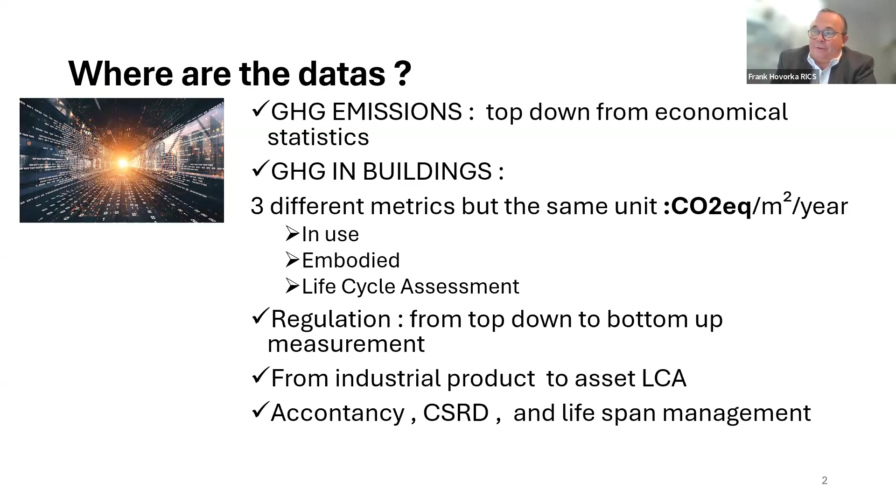And it's quite important to have that in mind, because the CO2 emissions will depend, of course, on the service you expect, but also on the material or equipment you are using, how this material is made in the factory, and what is the fuel source at the factory, because it will have an impact on the embedded CO2.

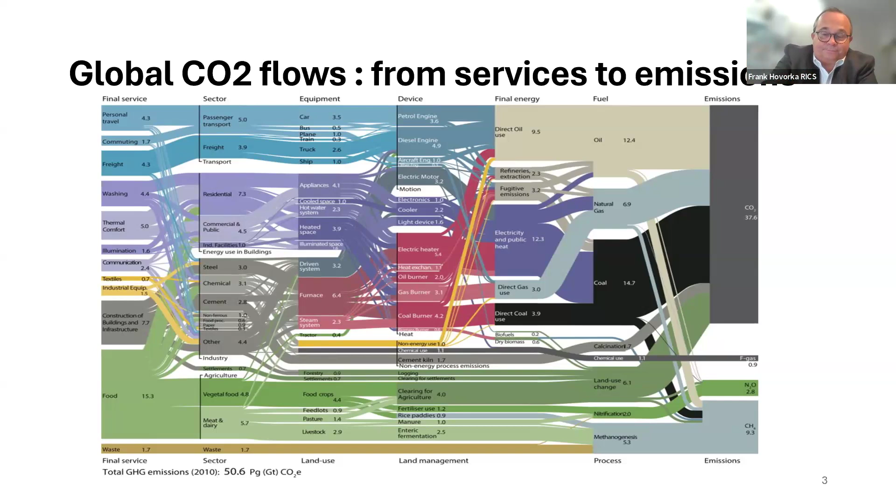What I also want to insist on is that we use the same unit, CO2, but we have to keep in mind that when you look at the declarations, there is also the need to look at whether we are talking only about CO2 emissions, or whether we are also looking at the other gases which have a warming power.

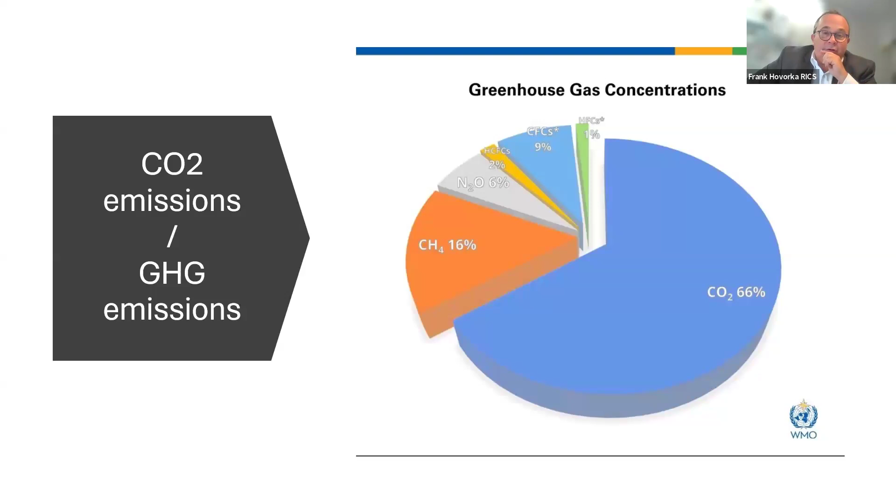And then we see that the most important one is, of course, CO2, but we are also impacted in our business by CFCs and HFCs, which are the gases that we use mainly in heat pumps or air conditioning systems. So it clearly has an impact. But having said that, we also have a third metric.

So you see, we have CO2, CO2 equivalent, but we also have a third metric, which is the life cycle assessment, also expressed in CO2 equivalent per year, but it's a totally different calculation, because we look at the embedded carbon in building materials, then at the use stage of a building, where we look at the emissions linked to the energy consumption of the building itself, but we also include the impact of replacement, repair, and refurbishment according to the lifespan indicated in the product declaration. And we can also look at the post-use of a building and the end-of-life stage.

I will not go deeper on that, because I'm sure my colleagues later on will go into much more detail. But it's important to keep in mind that when we speak about CO2 and about how to deliver information back to the market, we are using CO2 equivalent per square meter per year, the same unit, but we are not saying the same thing when we speak about impact in life cycle assessment, yearly CO2 emissions from the energy consumption of a building, or CO2 emissions that happen once when you build the building during the construction phase.

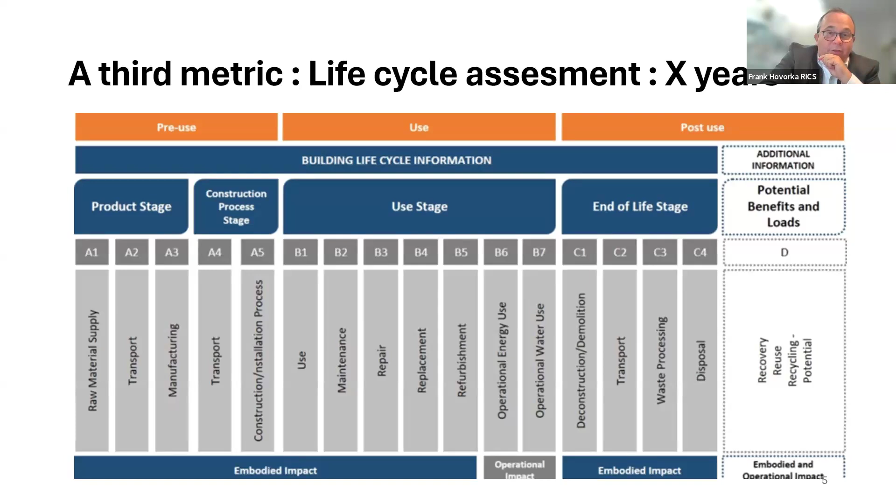We also have another problem with energy performance and carbon emissions, because when we look at the building itself, under different regulations in Europe or around the world, you look at building-related emissions and energy use that can be regulated or unregulated. In every system, we don't take into account non-building-related energy use, which is plugged into the building. But when you look at yearly CO2 emissions in the national definition, we have to take it into account. So it's not in the regulation, but you have to take it into account in the yearly national declaration. And of course, we then have all the definition problems with on-site production, imported energy, exported energy, and on-site renewable energy production.

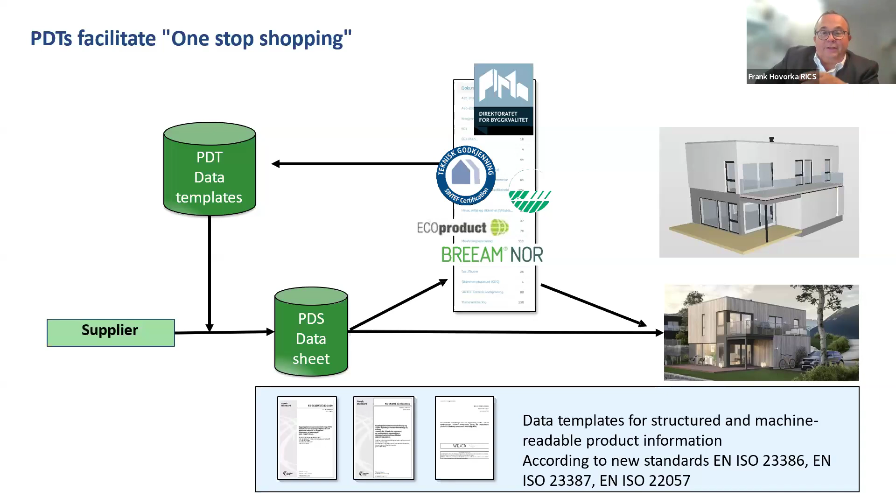So it could be any certification process that we have here, or like in France, in the regulation that we have, which is mandatory to do a life cycle assessment for each building. And then it can be used in the handover documentation of the building.

The challenge we have to face now in this digital product passport and environmental product declaration is a harmonized approach with the same definition, the value, the way it was measured or calculated, the way it was certified, and we need to have for each product a unique identification tag in order to identify a product into a building or into a

digital twin. So this is really the challenge for the European Union in this new regulation to be tackled, and it will take, as I said, at least 5 to 6 years to finalize this work to achieve such standards on data templates and data sharing.

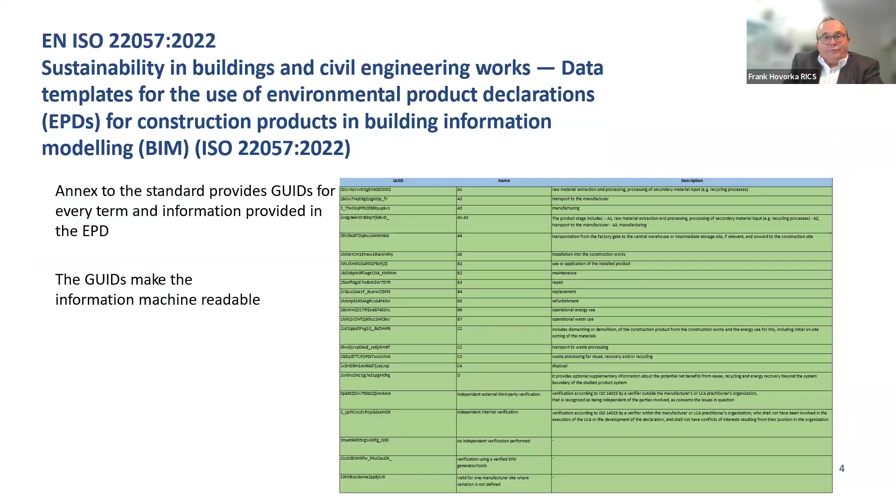You can have here an example of how this ISO standard is used for data templates of your environmental product declaration. But what is interesting is something we have worked on, for example, with our colleagues in the northern countries, Norway, Finland, Sweden. The idea is to have an environmental product declaration which is produced by the industry and the supplier. This information is then sent to a database depository, which are now these companies that you have under the name

of company PIMS. It could be used by a machine-to-machine readable system, because you can't do a life cycle assessment without that, because you can't do it on an Excel sheet. If you have to face up to 400, 500, 600 types of components in a building, it's impossible to manage all the data in another way than to have a machine-to-machine readable system. And then you can have this design, and you have also the impact on the construction.

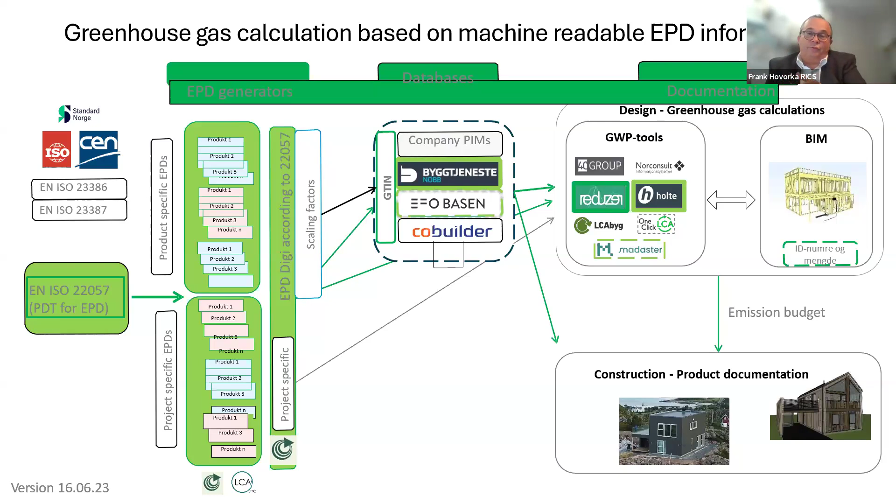So the standards are existing. It's ISO standards. It works. What we don't have now is the interoperability and the machine-to-machine readable data system in order to move easily from the EPDs to the database, to the lifecycle assessment tools, into the certification process in order to achieve that.

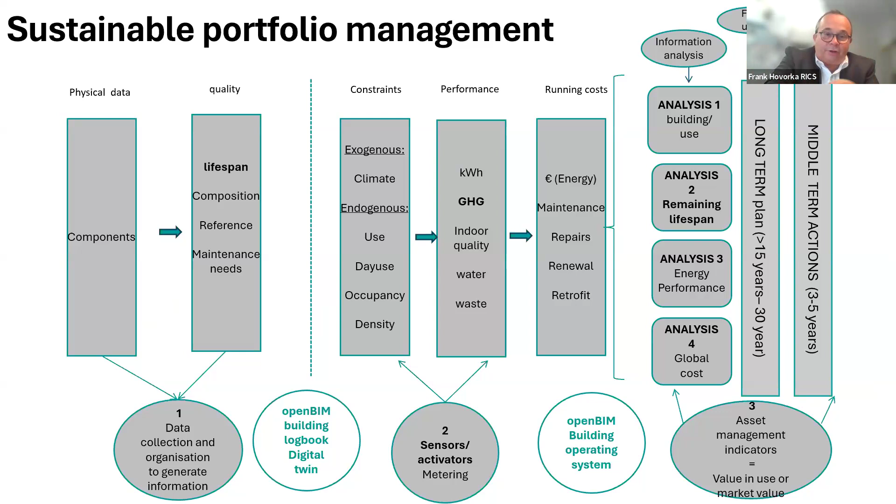But the idea behind is not only to have information about environmental product declarations embedded in the building and how it works. It's also to work on the impact that it could have on finance. And I will show you that because it's something we have developed for Europe and how to achieve a sustainable portfolio or sustainable building. We are also pushed by the regulation, carbon regulation in Europe, market requirements, and of course,

financial regulation. I know that it's not obvious, but we are really pushed by the financial regulation, by all these corporate sustainability reporting directives that we have to face up to, because every company has to report its CO2 emissions and greenhouse gas emissions into a standardized reporting system.

It will have an impact on your extra-financial reporting as a company, and it has to be audited, and it has to be standardized in order to be audited and to verify your level of greenhouse gas emissions. And part of that is the embedded carbon in the materials and the construction materials.

So everything is linked, from the information given by industry about the embedded carbon of a product to the whole life cycle assessment of a building, which has an impact on the extra-financial report of a company and its economic value in the coming years because of these regulations that are going to be in place in the coming years. Thank you very much.

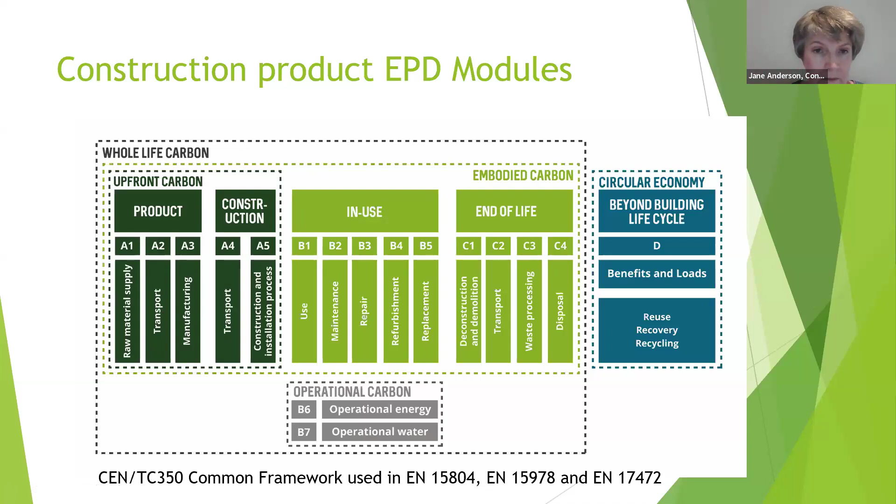Based on the scenarios, and they do now give you information on biogenic carbon content, and again that information is what's used in France when they look at the long-term benefits of carbon storage. It doesn't mean you have to do a different EPD, it's just the way they actually do it at the building level that's different.

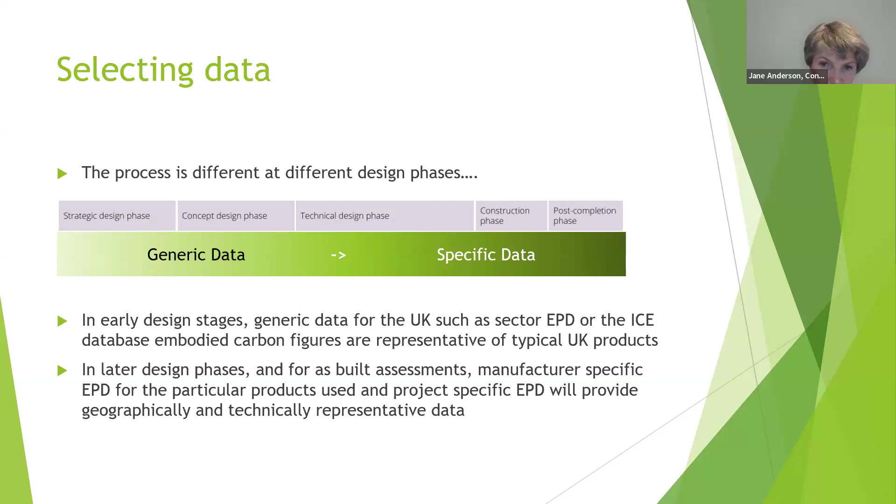And in terms of selecting data, basically in these early stages, when you're doing initial designs at the very beginning of technical design, it's generally best to be using generic data because you're not actually sure which manufacturer's product you're going to be using, and it will give you a good average, if you like. As you move through, ideally, you should be looking for specific data for the products that you're using. So if they've got EPDs, you should be linking to those, particularly for post as-built and construction assessments. So if there is an EPD, that's where you would be using it.

And it follows the RICS professional standard on whole life carbon, which looks at uncertainty of data, and I'll show you this then. So in theory, this goes through and tries to identify the data that would be the most relevant and have the lowest uncertainty available. So have a look at that. It's only suitable, as I say, though, for post-construction or when you actually know exactly what product you want to use. If you're at an early stage, then generic data would be the better data to use.

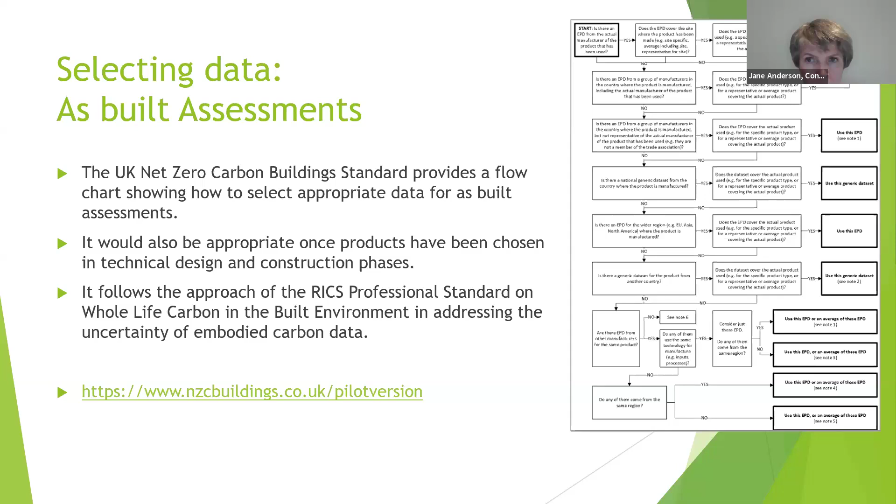And as I mentioned, the RICS professional standard has what we call a carbon uncertainty factor, which is one of the three things that join together to give you the uncertainty that you need to add to your assessments from technical design phase onwards to account for uncertainty. The carbon uncertainty factor just looks at the carbon data. There's another one for the design stage that you're at and another for the quantities data.

The carbon data only applies to the 10 carbon data sets that have the biggest impact in terms of embodied carbon over the life of the building. So you only need to look in detail at the 10 data sets that contribute the most in terms of embodied carbon. And for each of these data sets, you're comparing the actual products that you've installed in the building to the data set that you've used to represent them. You're looking at geography, technology, and time, essentially, and some other aspects which I'll show you.

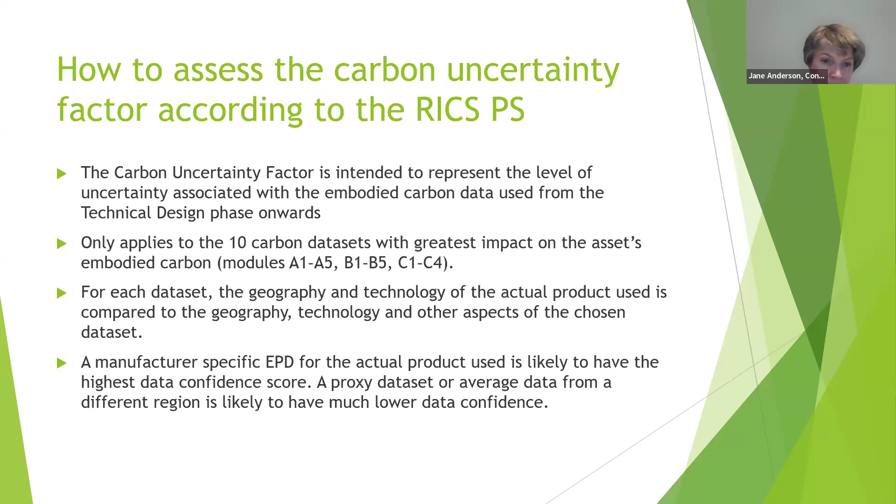The same for technology, in terms of the technology used to make the actual product and your data set, how specific the data is, and then how old the data is, and then how specific it is in terms of granularity, how many manufacturers it's covering, and then whether it's been verified or not. And I'll give you some examples.

So this one, if you've installed a lightweight block made by a particular company that doesn't have an EPD, and you've used the ICE database data, for example, then in terms of geography, that would actually be very good, because the ICE database is intended for use in the UK. It uses data sets that are relevant to the UK, so the geography would be good. But the actual data set in ICE is for medium dense concrete, not lightweight aggregate concrete, so it only partially reflects the technology. And in terms of specificity, the ICE database is very much an average data set, therefore only fair in terms of its quality here.

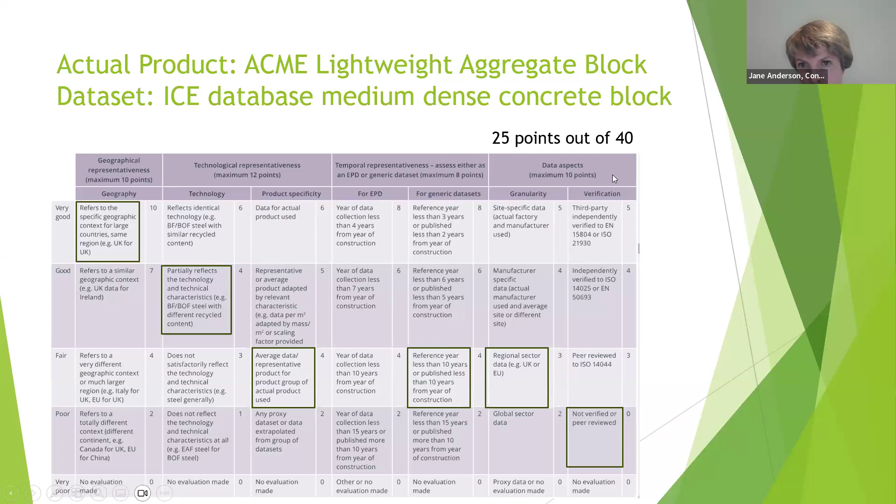And then as it's a generic data set, we use this column here for its temporal representativeness. The ICE database was last published in 2019. They are about to launch a new version. So it would come in here because the reference year or publication is more than 5 years. And then in terms of the granularity, it's regional sector EPD data, and it hasn't been verified or peer reviewed. So when you add up these scores, you get 25 points out of 40.

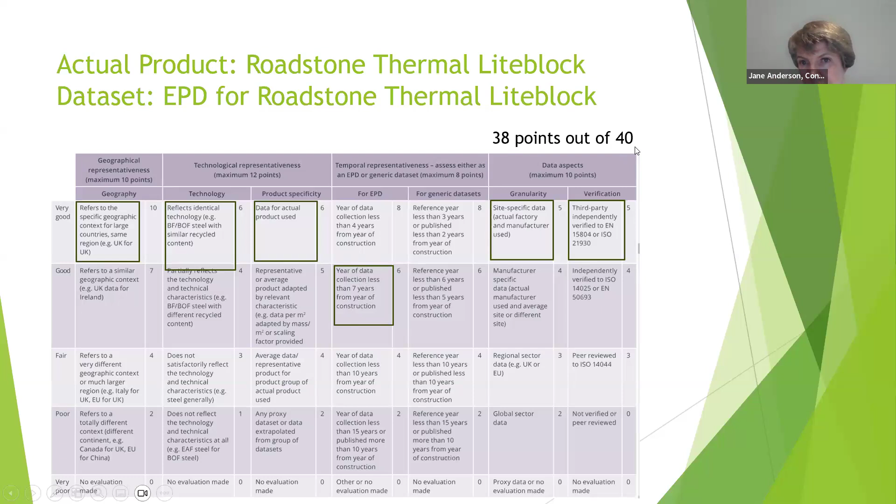Whereas if, for example, you used a product that does have an EPD, a thermal lightweight aggregate block, then you could use their own EPD, and here it gets top marks except for the year of data collection, because that was more than 4 years before the year that you'd be installing it in the building. So that would get 38 points out of 40. So hopefully that helps you to understand how that works.

2 minutes, Dave, sorry? 2 minutes. Okay, yeah, I think we're fine.

Making comparisons with other products, it's really important. You can compare different types of products. So you can compare apples and oranges. If you were looking at calorific value, let's say, you wouldn't be able to compare them in other ways.

So 15804 provides rules for comparison. So long as the products provide the same functional requirements as defined by legislation or the client's brief, then you can make a comparison. So you can compare, for example, a blockwork wall and a timber frame wall, so long as they do all the things that building regs and your client wants that wall to do. They can be made out of different types of material.

But you need to make sure that you've basically included everything. So you would need not just the blocks, but the mortar, for example. So you're taking account of ancillary materials and other parts of the system. So you need to do that. If you exclude something, you could, for example, exclude the paint because it might be the same for the two systems. And if you were comparing different types of brick, you could exclude the end of life if that was basically going to be the same.

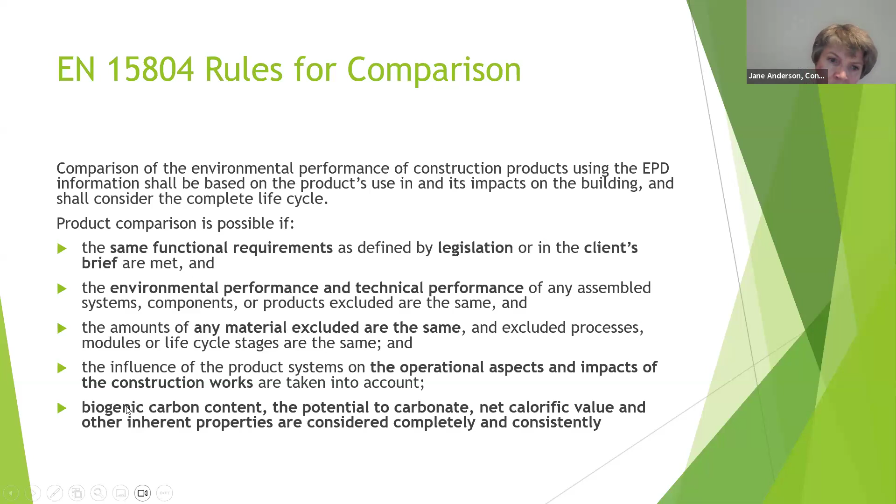And anything that has any impact on the operation of the building, for example its thermal performance, you need to take that into account. And you need to check that your EPDs have been calculated consistently. Those are the kind of rules. Things to watch out for: you need to check the scope of the EPD, what's included. So has it included water or does it exclude it, for example?

Can you convert the EPD to the same declared unit? So for example, if you've got your blocks and some are in meters cubed, some are in tons, some are in kilograms, you'd need to convert them to a meter squared so that you could actually compare 1 meter squared of walls made with the different blocks. As I say, the ancillary items like mortar. Do they have different service lives? You might be looking at roof tiles, for example. Would you expect one to last longer, in which case you need to take that into account? And again, the end of life, particularly if the EPDs say different things about what happens to them, would it actually be the same, and is it relevant?

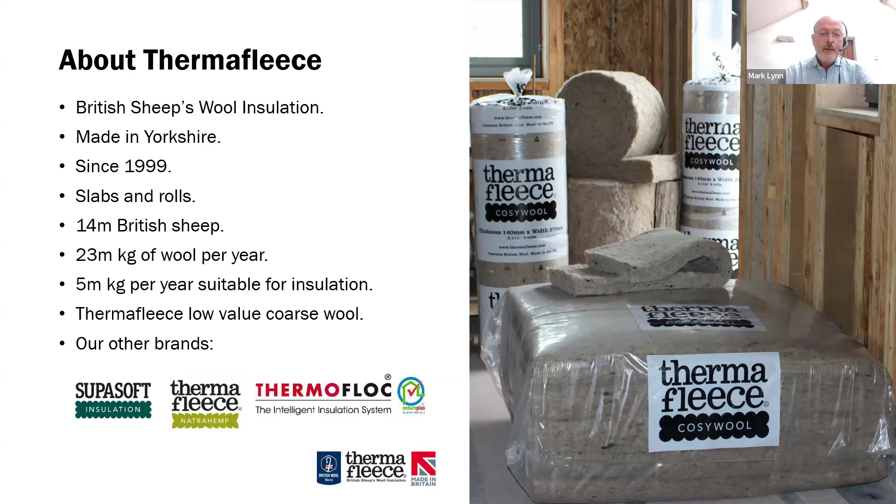And we've been featured on various media. We've even been featured on Coronation Street. Don't ask me about that.

So why an EPD? Well, I think the first thing is it supports green claims, because I'm committed to this sustainable built environment, but you can't just take my word for it. So you need evidence to back up what you say, and we've heard that from the two previous speakers, and it shows a commitment to transparency and objectivity as well. And I think transparency is key to the future of the built environment.

And it's interesting because an EPD isn't a statement that something is sustainable or not. I've certainly heard Jane say that. I don't know if she mentioned it in the presentation, but she's certainly made a point of it in the past, and it's true that having an EPD is not a statement that a product is sustainable. An EPD is a report that shows in a verifiable, objective way that a product has various impacts across a series of categories.

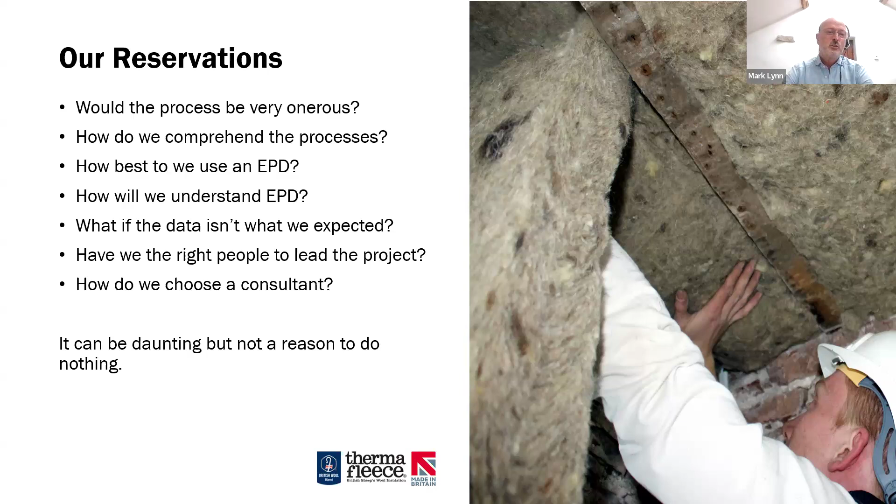And then how do you choose an expert? I think it's probably a useful thing for maybe Jane to feed into, because we went through this process about 5-6 years ago now, and it was difficult finding appropriate consultants, although we were fortunate in that we knew one that had worked with us before. But choosing an expert or a consultant is quite a challenge. And just because it's daunting isn't a reason not to do it. It does look daunting, but it's not as tricky as it looks.

Understand the process. As I said, it's an exercise in mapping and data collection first and foremost, and then understanding the boundaries and allocations. Just on the allocation, in our case, our impacts are allocated on an economic basis. There is criticism of sheep farming, for instance, in that it produces a lot of methane, and those in turn have impacts, which is true. But what we've got to do is work out the economic value of all those outputs, and then work out on an economic basis what the allocation of those impacts are for our products, and relative to the other farming outputs, the wool that we use is very low impact.

We chose to set the boundary at a point we thought was fair, and there's a temptation to try and fudge the boundaries to make your product look better, and we didn't do that. We could have put the wool cleaning process outside the boundary, because strictly speaking it's a rendering process, but we thought it was disingenuous to do that, so we included those impacts in our LCA and our EPD, because we wanted it to be the most honest assessment of our product, and not to try and pull the wool over people's eyes, excuse the pun.

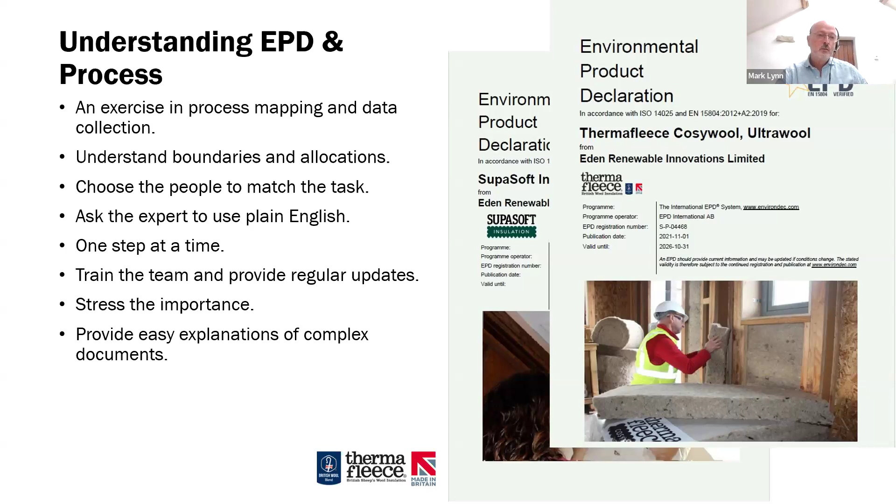We had a kick-off meeting in July, and then the LCA, the life cycle assessment, was complete in October, which is about 3 months. Then COVID hit. But typically drafting the EPD would probably take another 3 months and then a month to get it verified. So we're probably looking about 6 to 9 months from start to finish. I don't know if that's along the lines of what Jane would expect or not, but

obviously there's a lot of data collection required. It's not a bewildering amount of data, by the way, but there's data that needs to be collected. So 6 to 9 months, as long as you don't sort of sit on your hands waiting for other people to do things, then it's not too difficult, really.

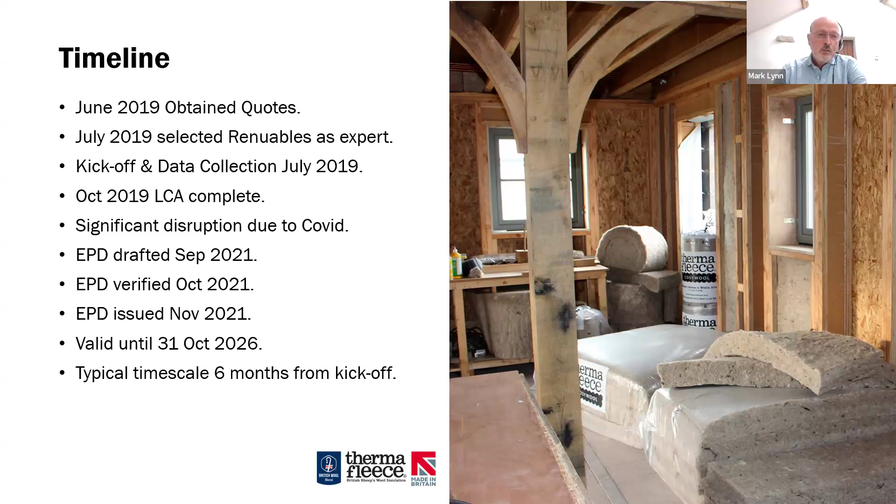Costs. We got 2 EPDs covering 4 products. So we've got 1 EPD for our CosyWool roll, slab and UltraWool, which are sort of variations of the same format, and 1 EPD for our SupaSoft recycled polyester insulation. And the total cost at 2021 prices, so don't shoot me if these are a lot higher now, because we obviously had a big bump in inflation since then, was about 15,000.

And that covers a 5-year period because the EPDs are valid for 5 years. You've got an annual fee. So if you annualize that cost, it was less than 4 grand a year, or less than £1,000 a year per product. So if you're an SME and you're saying you can't afford 15 grand, then you've got to have a look at your budgets and work out where your priorities are, because 15,000, you're probably not going to get a lot of change out of that doing two exhibitions or 2 shows. And so you just got to work out where you're going to put your budget.

If you haven't got a 15 grand marketing budget as an SME, you've got to question whether you've got the right business model and funding model for your business. So I don't believe, and I can say this because I'm living it, that EPDs are too expensive for small businesses. It's just a question of prioritizing where you spend your money. And there are lower cost ways of doing these things, but you've just got to be mindful that sometimes you get what you pay for.

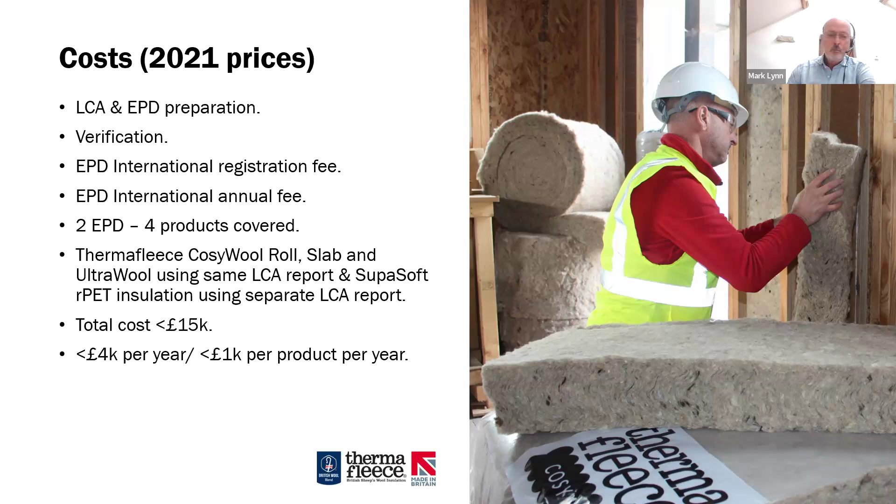Learnings: well, it's manageable and affordable. I believe it's a high priority. It should be a high priority, particularly if you're, like us, running a business along sustainable lines. It creates a greater understanding of your proposition and gives you the confidence. And it provides an opportunity for the rest of the team to learn that as well.

And if you're going to do it, just pick the right people for the task. It's sort of seen as a very sciencey thing, but actually a lot of it is data collection in the first instance and process mapping. And a good expert will be able to talk you through that. So you don't necessarily need to pick the most sciencey person to do it. I'm the most sciencey person in our business, but I'm probably the least organized. So someone that's got maybe some good, strong organizational skills might be a better one.

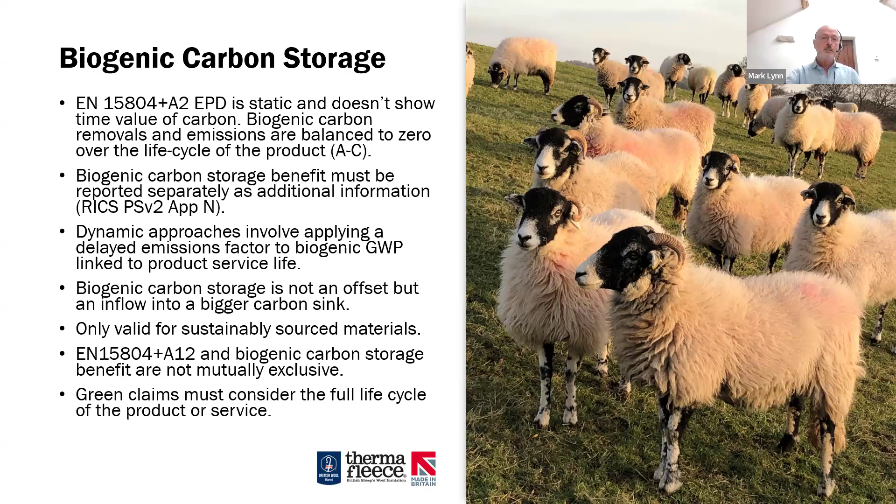I don't think any of the pictures have much relevance to what I was saying, but there was something nice to look at if you couldn't be bothered listening to me. But thanks anyway. Thank you, Mark. That's your usual humor, but some plain English.